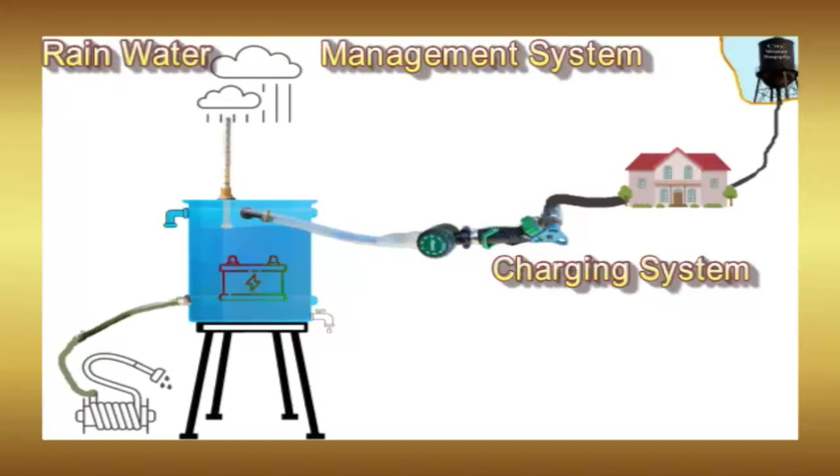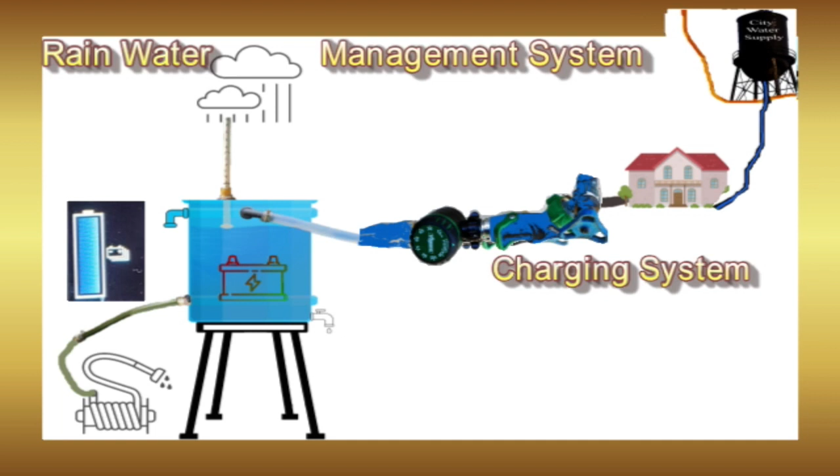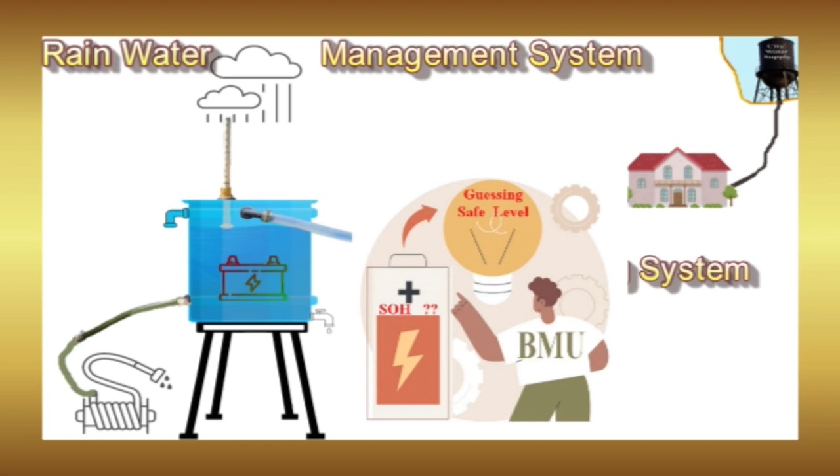Here is an analogy of my Outlander's battery management system for you to consider. Imagine a rain barrel as a surrogate lithium battery and the amount of water in the barrel being analogous to the charge. Also consider our home charging system being the city water supply and infrequent rain being the regenerative braking system. In this scenario, as managers of this conservation system, we represent the Battery Management Unit, or the BMU for short. With this in mind, we have some important tasks.

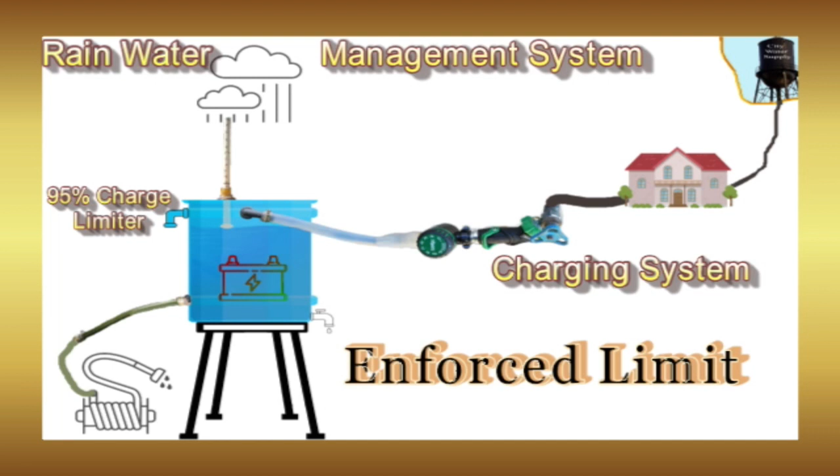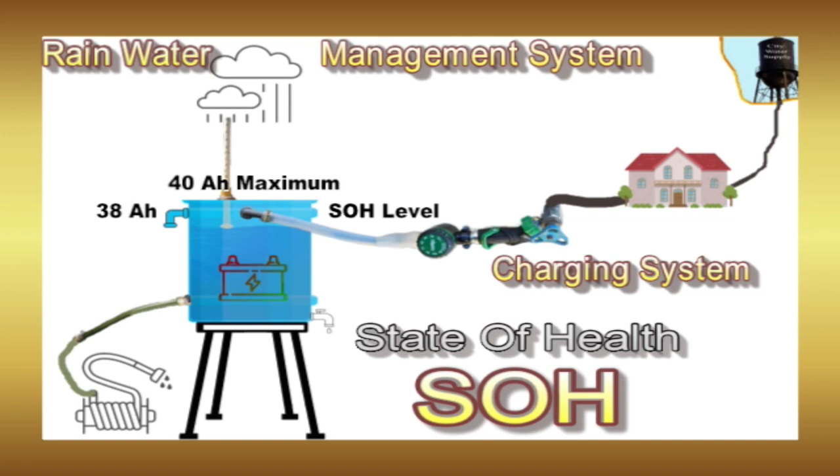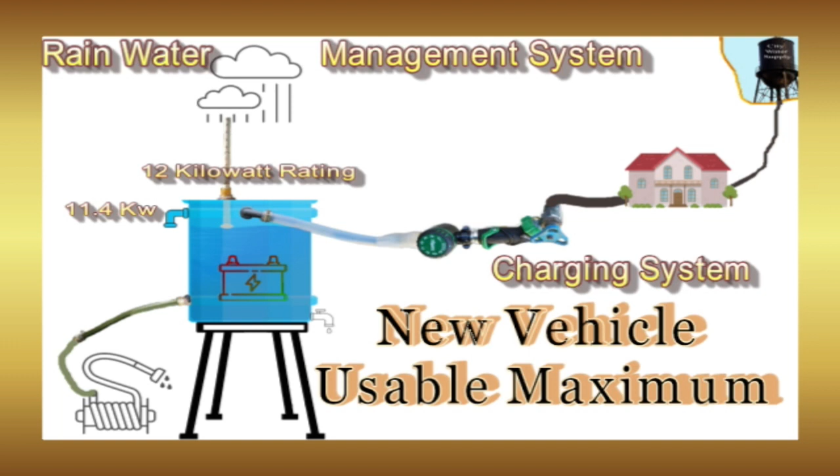For my PHEV Outlander, this means that the BMU will only allow 38 amp hours of the 40 amp hour rating to be added to the battery. When measured, this maximum is called the State of Health, or SOH, for the battery. Since it changes with aging, it's also something we have to be concerned with. As a practical result of this initial restriction, the maximum I could have ever gotten from the advertised 12 kilowatts by Mitsubishi was 11.4 kilowatts from my battery.

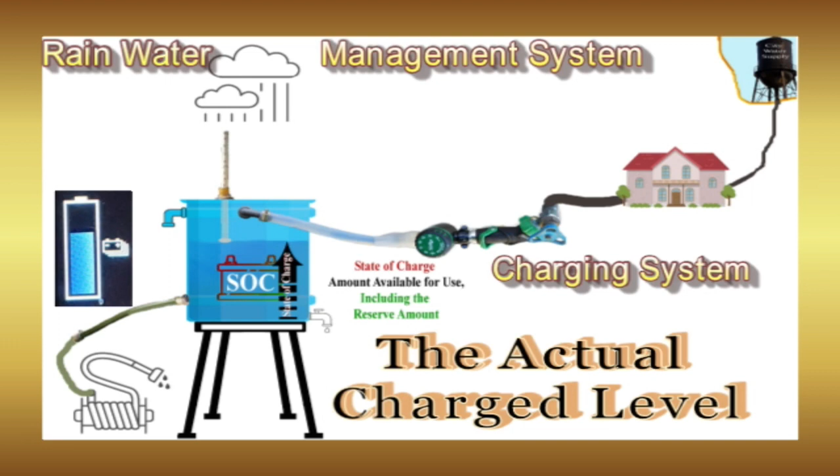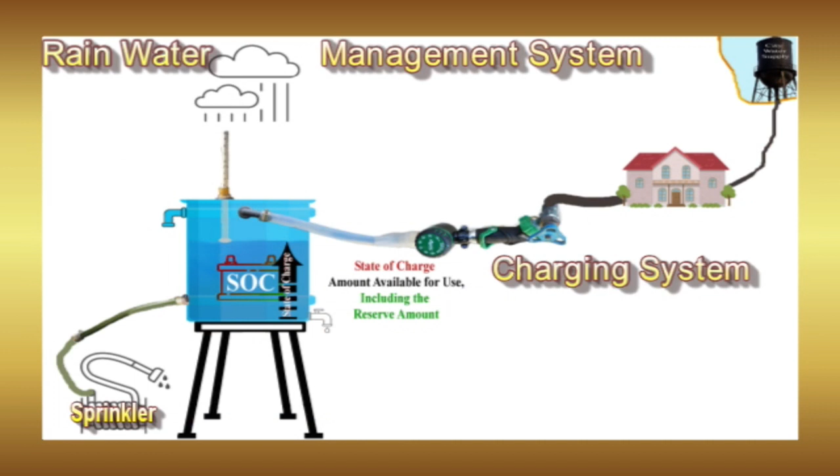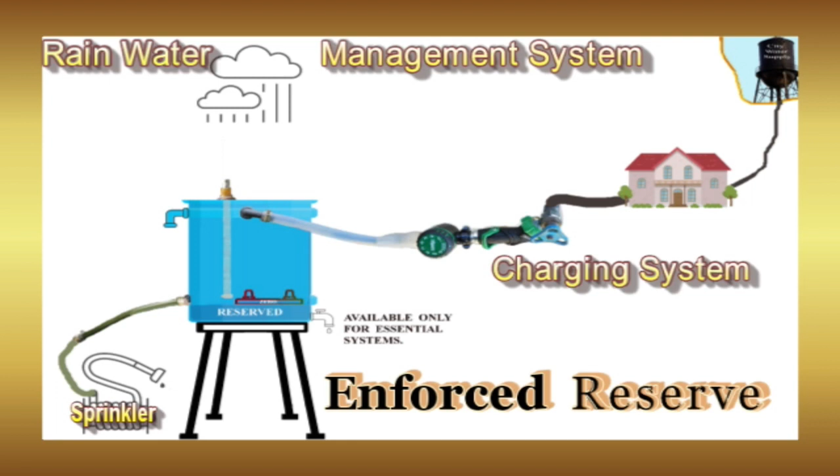In contrast, battery state of charge, SOC, is the remaining level available for the vehicle to do its work, and analogous to the water level in the barrel. The charge you have to water the lawn or roll the vehicle down the road is limited by another force controlled by the BMU. The PHEV needs a certain amount of capacity to run the internal workings of the drive system. So a reserve has been set up for the BMU to enforce, which lies below the point where your dashboard readout says 0 charge and the gas motor cuts in.

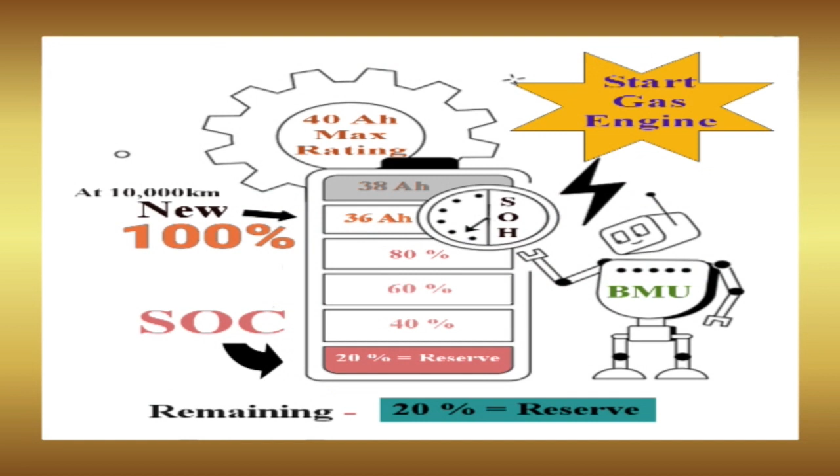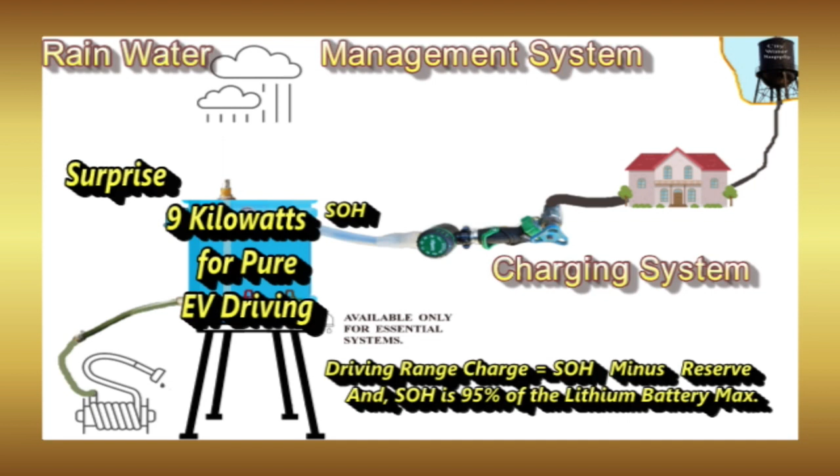At about 20% of the state of charge, this brought my actual EV driving allowance down to now 9 kilowatts of the advertised 12 kilowatts, which was a new buyer surprise for me. So the battery is never fully discharged under normal use conditions, leading to other complications to discuss later.

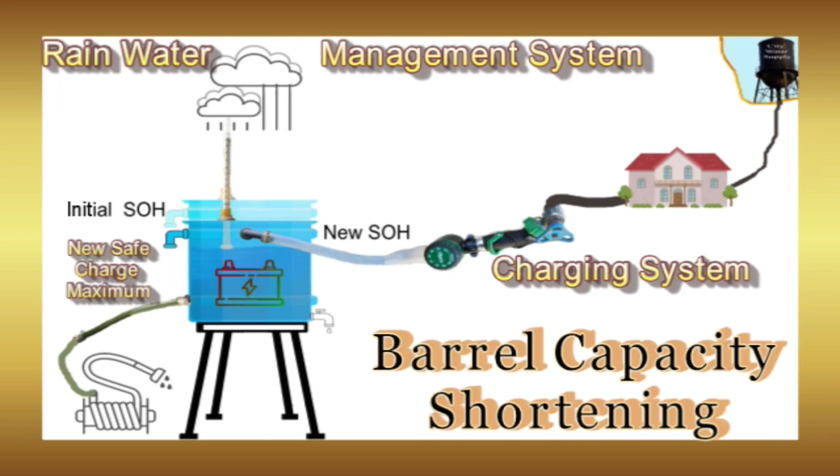To understand the third important factor, imagine over time the barrel gets slightly shorter with each charging cycle. This in turn lowers the safe maximum charge level each time. The BMU is tasked with guessing the declining state of health. It is a very old piece of technology, which is believed to blindly enforce an unrealistically aggressive reduction at each charge. Over time, an artificial gap emerges between the actual state of health and the BMU's guessing. This distortion requires correction to recover valuable driving range.

While a water barrel can't really get shorter, the analogy attempts to simulate the individual battery cells becoming charge imbalanced at different rates. So the job of the BMU is to protect the PHEV's 80 cells by not letting the pack accept more charge than the weakest individual can accommodate. Understanding these mechanisms brings us back to the opening screen of the Watchdog website and what is being compared.